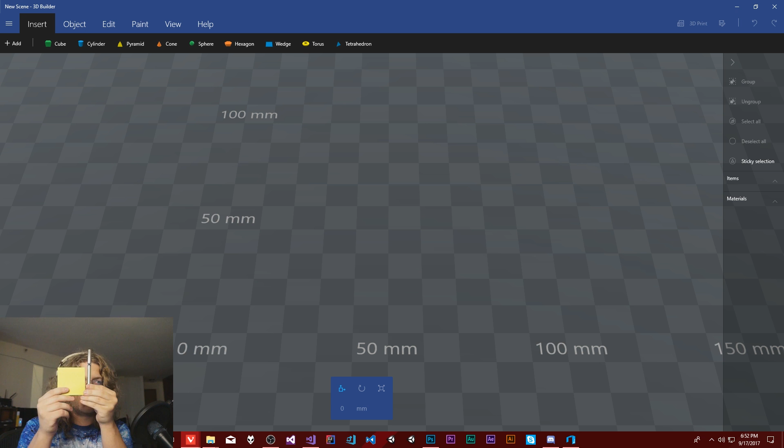Hello Internet! Today we're going to be doing something a little bit different. We're actually going to be working with 3D Builder to build a really quick 3D printing model that I can use to store sticky notes and a pen, and hopefully attach that to the wall so it'll sit like this, and you'll be able to pull this out or pull this out and it will just work. It sounds super simple, but hopefully we can figure out a few additional things about 3D Builder. I've done a video on this before, and hopefully we can dig a little deeper, because we're going to be using strictly 3D Builder to build this entire thing. I'll probably need Cura for 3D printing, but other than that, it should be entirely here.

So the first thing, we need calipers, because we need to measure how thick this pen is. I don't know if you guys can see that, that's going to be hard. Let me actually, hold on, we can do this better.

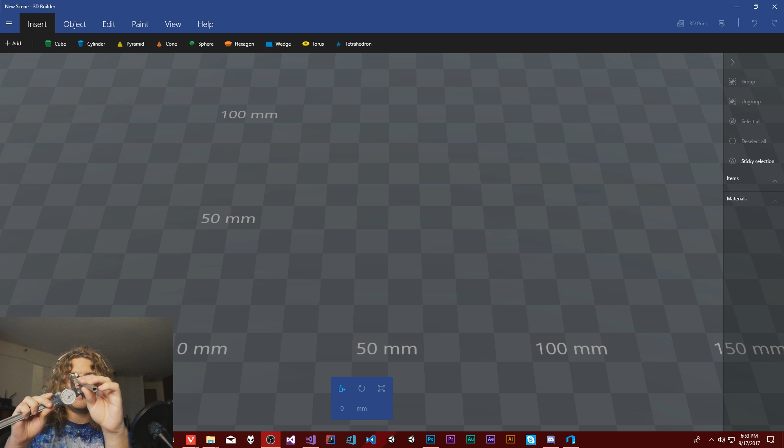Getting back to the calipers, the way these work is they get you fairly precise measurements. I've already measured these, but just so you get the idea, you pinch whatever it is you're measuring in between there, and it will read off along this big line here.

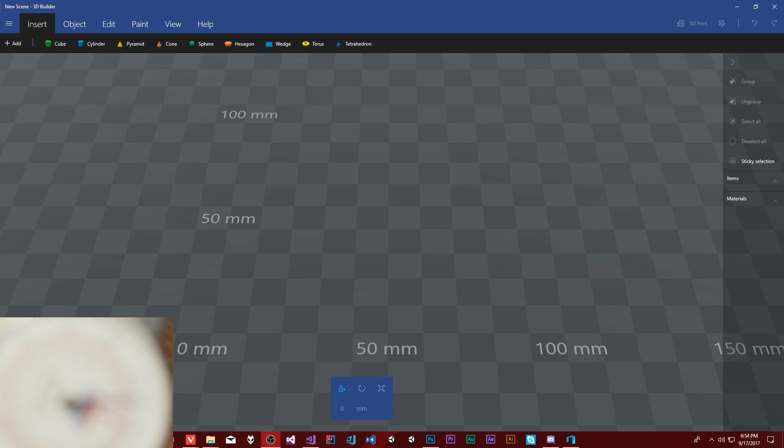There are going to be some measurements. That's going to be totally out of focus because I haven't focused on my camera. Hold on, we're going to get this right. There we go, that ought to work. So if I can, oh, I moved it again. This isn't working very well.

Anyway, doesn't really matter, but all you need to know is this will let you measure the width of something. In this case, this pen is 10, I believe that's centimeters - no, that would be millimeters. 10 millimeters. So the pen is 10 millimeters, which means we need a 10 millimeter wide hole for this to fit into. And these are about the same width.

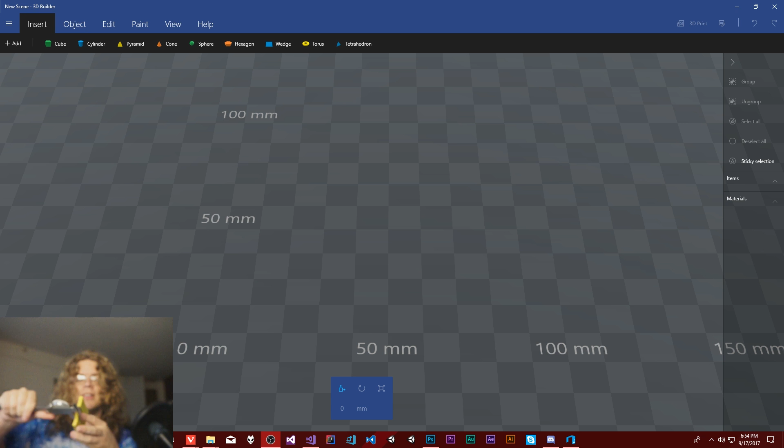They're a little bit thinner, but that's fine, we can use the same measurement and it'll just have a little bit of play. They're actually exactly 3 inches wide, but we're using everything in millimeters, which comes out to about 80. It's actually slightly under 80, but that's plenty for us to use. I don't know why I'm showing that to you, it's not going to be very helpful, but just so you know where all these measurements are coming from, that's how I'm doing it - just measuring them there.

So to fit this, we need something 80 millimeters wide and 10-ish. I'm probably going to round that up to 12, just so the pen doesn't fit tightly. I don't want things tight in there, that just doesn't seem like a good idea.

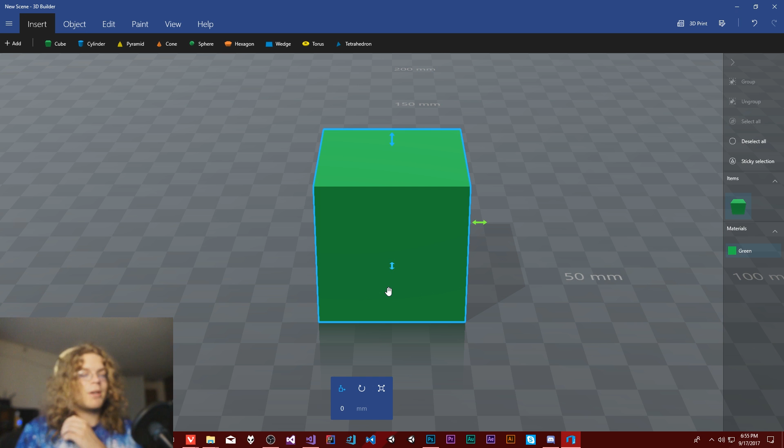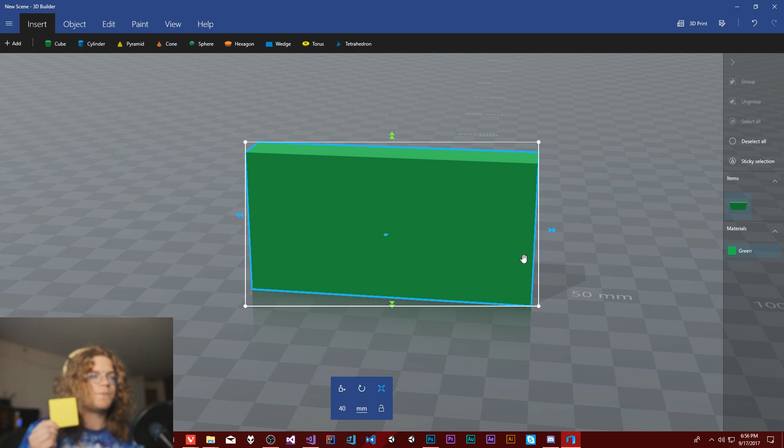So we can get started. What I'm going to do is model two bits. First, we're going to do the inside, which is the parts we're actually cutting out for this. So if I unlock this, we want it 80 millimeters wide and about, let's do 12.5 - that should be plenty. And then height, it's going to be 80 millimeters high, but we don't want it all the way to the top because then we can't pull it out, and that's sort of the key point of holding something there.

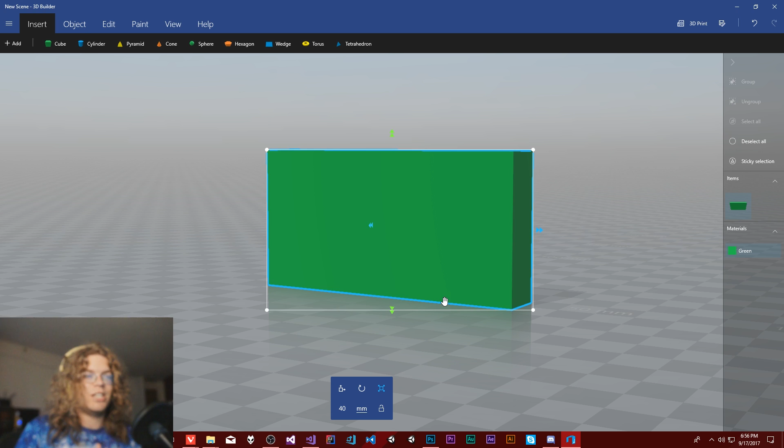So I think we can do - is 60 a good idea? We could actually, let's keep it at 40 millimeters high. We can play with this, it's 3D printing, so we can come back and change all of these later. That's one of the nice things about this - the way we're doing it, hopefully we can come back and pull some of this out and work with it and change how it all works.

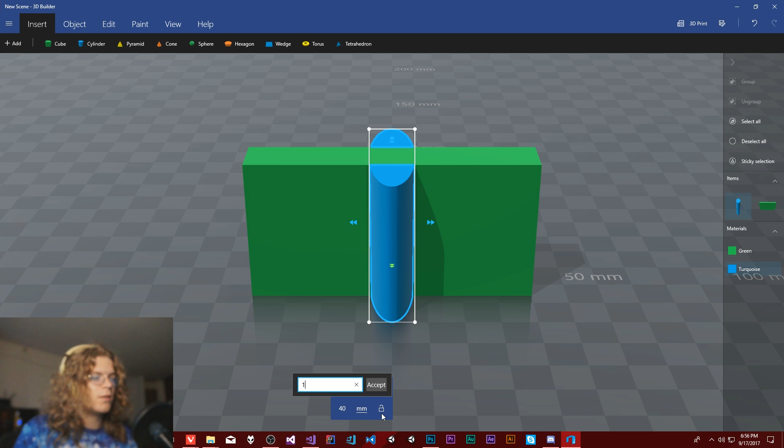But we'll see. Then we need something for the pen. So this is just going to be 12.5 by 12.5, and then we already have 40. And then I just need to offset this so it's not intersecting with that.

So let's see, 51.25 - that'll be 5 millimeters between the two for spacing, but actually, I don't want that. What I'm thinking is about 2 millimeters wide for each of the barriers. So I'm actually going to copy that here and do 48.25, so there's 2 millimeters between the pen and the sticky notes.

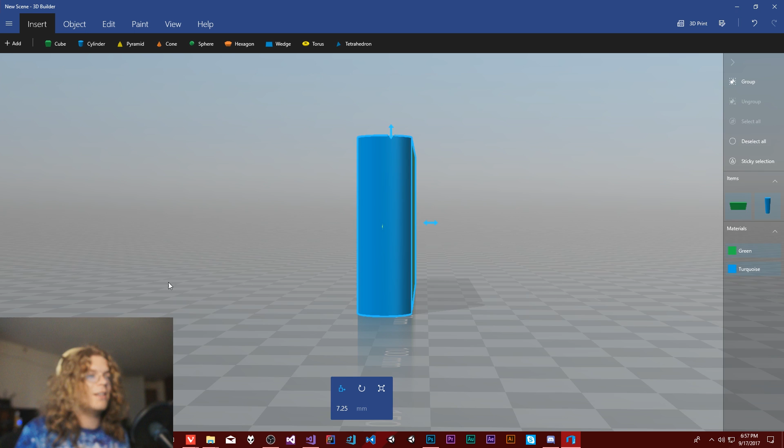And this should pretty much be our first piece. That's really all we need. If we wanted to, we could add additional depth here, so we could have multiple of these sticky notes in one of these, but I'm not really worried about that - I just need one right now. So let's grab, what's the best way to... oops, not that.

Let's join these. So if I merge them, they're now one object. And can I paint these color?

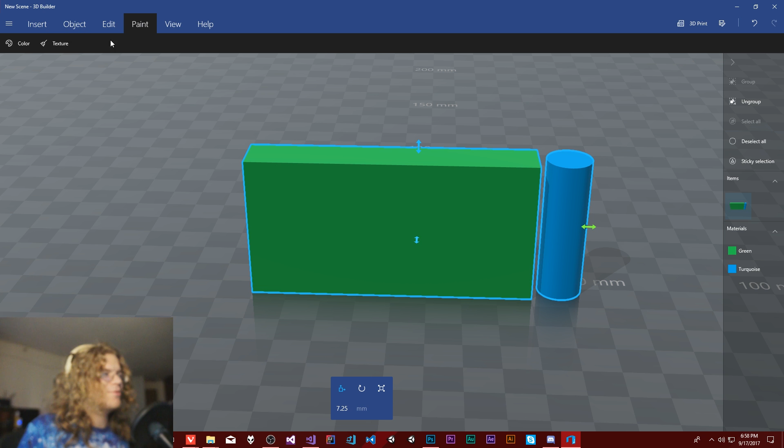That didn't work. Apparently that's not how you paint something. I don't know, kind of would have assumed that would have worked.

Okay, let's ungroup it, and we can select them by material or do whatever. I'm going to try painting it again. Oh, well, that was easy. You have to actually click it. Okay, got it, so that's green. Green is now our...

Okay, what? There we go, you have to be in edit mode to select two things. Got it. Obviously it's kind of showing that I'm still learning these tools, but that's kind of the point here,

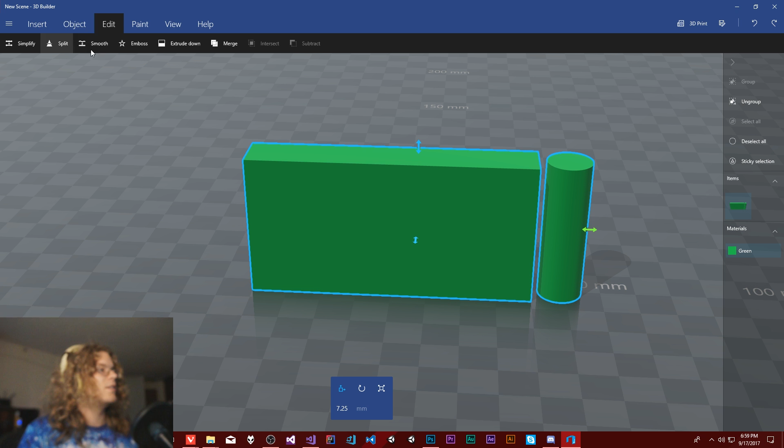is we're all hopefully still learning. So there we go, this is what we want to design around. And so the next thing I'm thinking, we can actually move that back for now. We just need to know how wide it is, or close to how wide it is, and how thick it is. So we had it 12, oops, that's positioning.

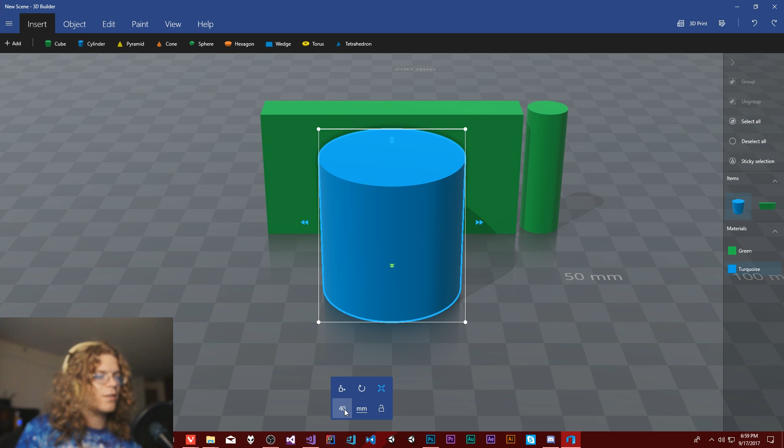We don't want that. I'm going to resize this so this is exactly the same size. And then we need to actually—I'm going off of this, by the way—but anyway, we need to actually increase the size of this by a fixed amount. So in this case, we're going to increase it by 2 millimeters on all sides.

So 4 millimeters, so we can increase that and increase that. And now that's grown. And then the tricky bit is we only want to increase the bottom because this is going to come out—we want a hole in the top. So we don't want to add additional space for that.

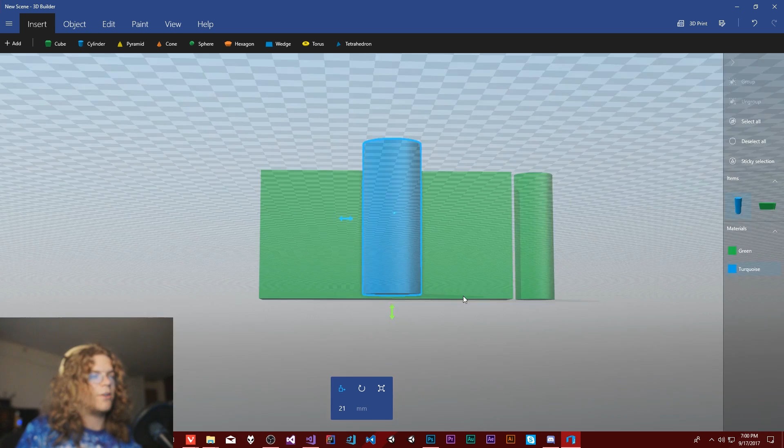So it's actually only 42 millimeters high, which means we can kick that up 1. And there we go. So now it's still sitting on the ground, and you can see it's slightly taller than the back, which is good.

And then we just need to kind of get this in somewhat of alignment. They should be at exactly the same position, because if they're not, this whole thing is not really going to work. 48.25, that seems close—we'll figure out if that's actually right or not in a second.

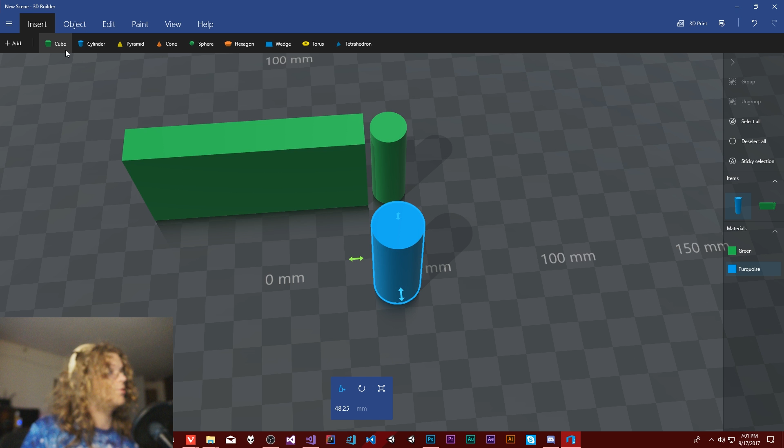But now let's paint this blue, just so the outside is the same color and the inside is the same color, and that way we can kind of visually tell what's going on.

And we need to do the exact same thing here, but we actually need to extend this into the middle of our cylinder. So this is going to be—we said 12.5, so 16.5 again.

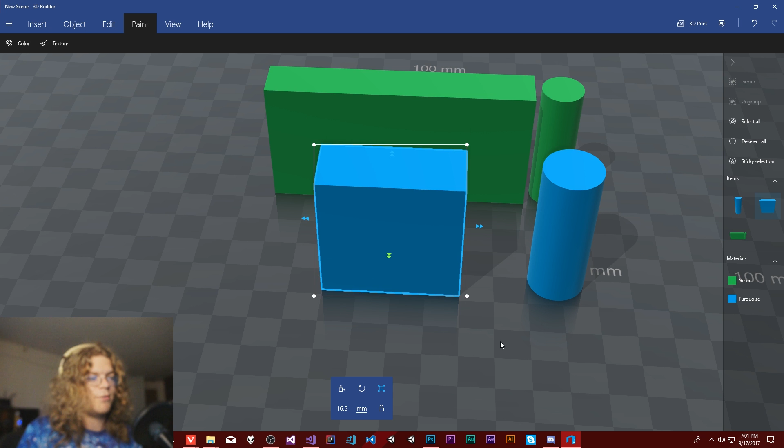And then width is—well, let's do height next because we know that. And then this is going to be 80 plus—does this actually work? Nope, plus 4, plus 2, okay, 82.

So 80 plus 2, we actually need that on both sides, so plus 4. And then that will get us to the edge of this.

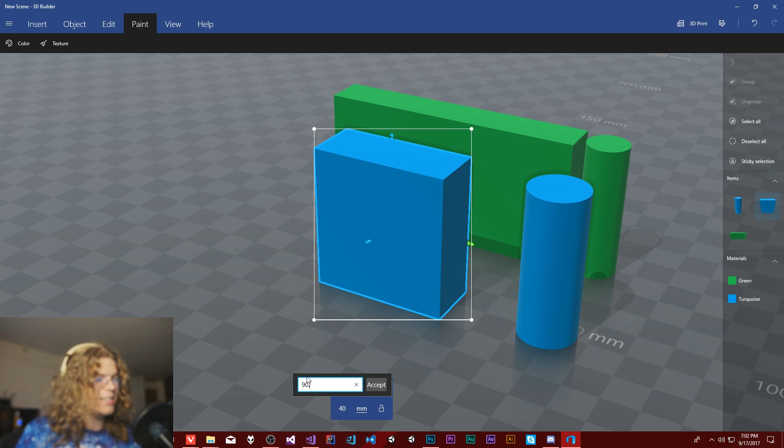And then what we want is to align this like so, so it comes directly into the middle. It just snaps into position. And so this is sort of our attachment.

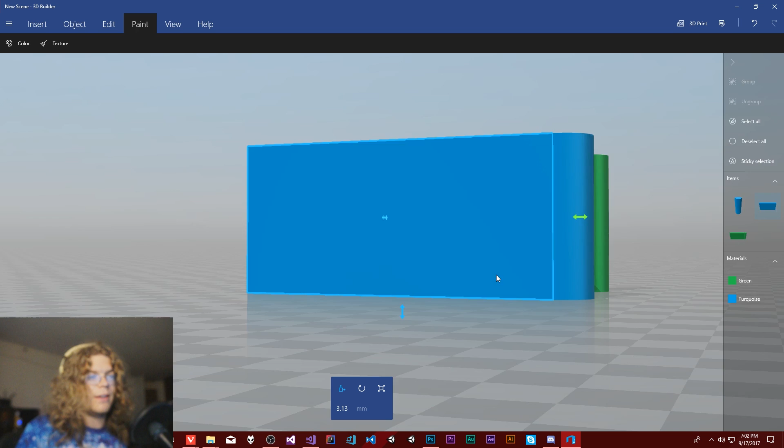What we can do, if we want to make this fancy, is we can either round out the bottom, or I can actually make it so the entire back kind of sits flush, like right here. If I wanted, I could actually tie that in just using another cube.

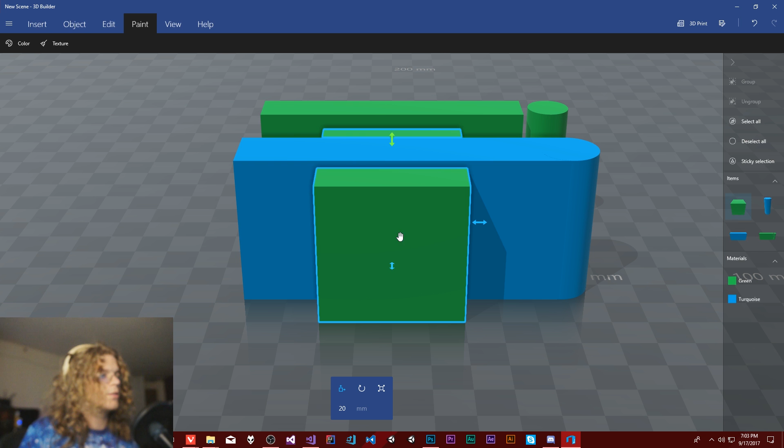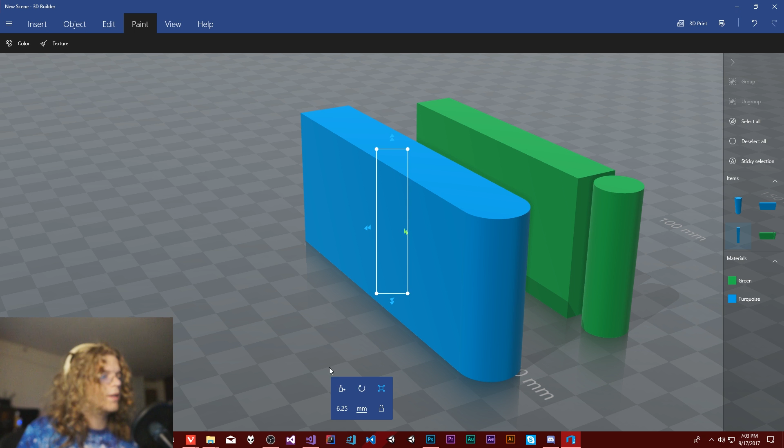So what that would look like is, let's color that. It's going to be 42 high, and then 6.25 by 6.25. And then we'd want to drag it over this way.

Did I not make you tall enough? I don't think I made you tall enough. Yeah, 42, there we go.

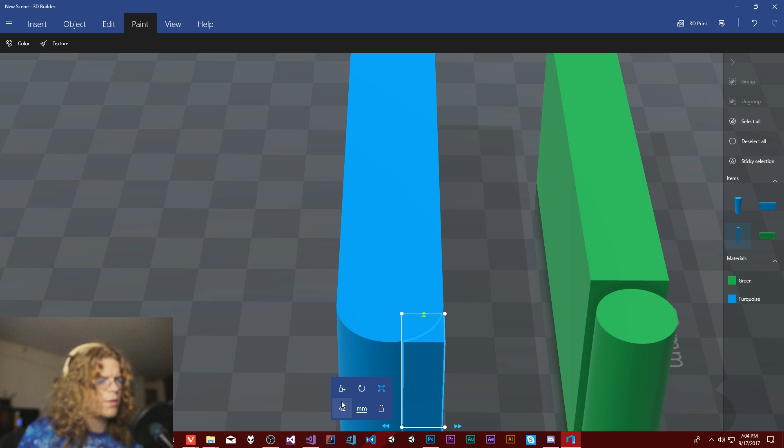And then I can just actually slide this into place, and it should just auto-align for me, like so. And now, if I can deselect it, it should be flush. Looks like we're a little bit off. What could that be?

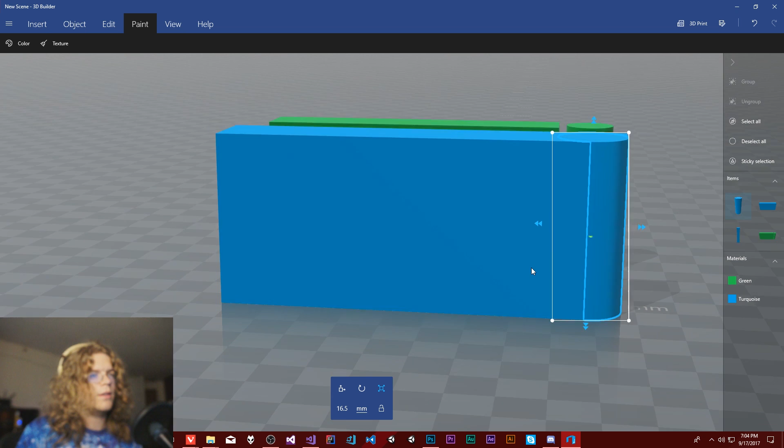Oh, sorry, 16.5 is what we need to divide. So this is going to actually be... that's going to be wrong for the other one too, isn't it? It kind of looks like it might be. Okay, so we have to refine our math a bit. But we can do this one first. 8.25 is what we want for both of these, horizontal and depth.

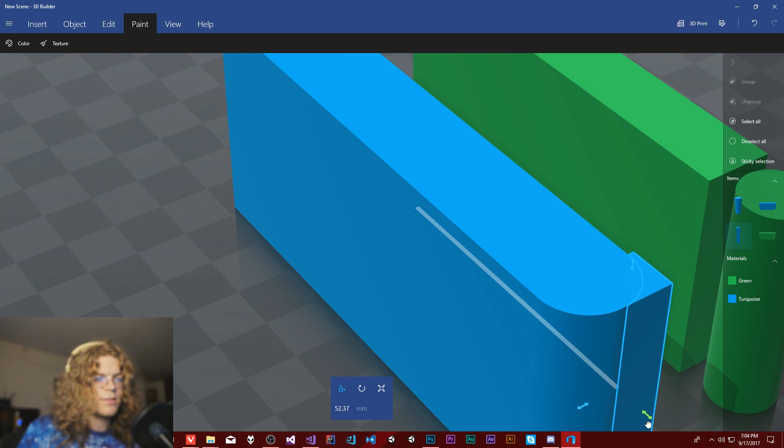And then let's move that into position. So just grab it and it will snap still. So there we go. That is our model, I guess.

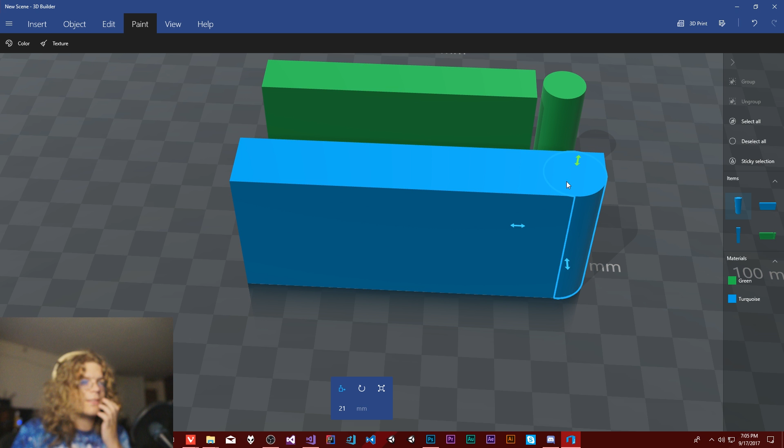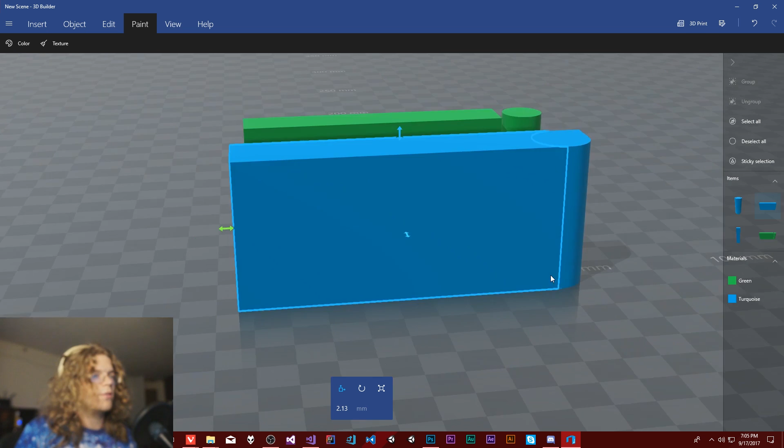Cool. So now we have sort of this round thing that we can use. The only other bit that we want to fix is going to be this, because I did that math wrong. So it's going to be 80 plus 4 plus 8.25, so 92.25. And that's because of the additional depth there, or the additional radius from this. We're measuring this guy and not the other one. So hopefully that gets us closer to where we need to be.

And then I should be able to just group all of those. So now we have this group, which is our exterior. I don't know if you can name that. Doesn't look like it. And then we have our interior bits.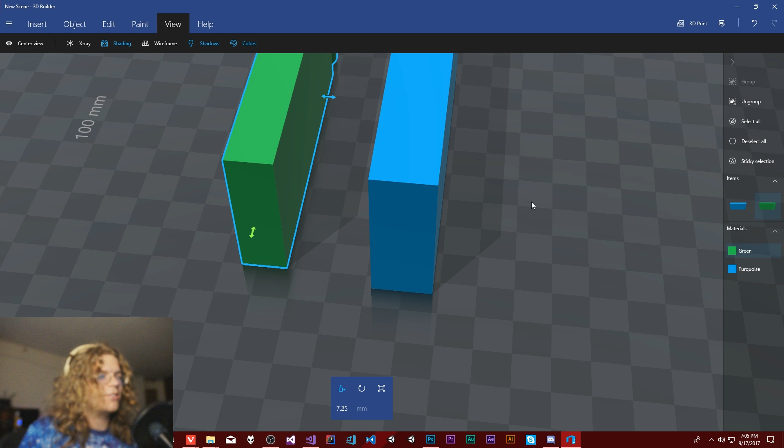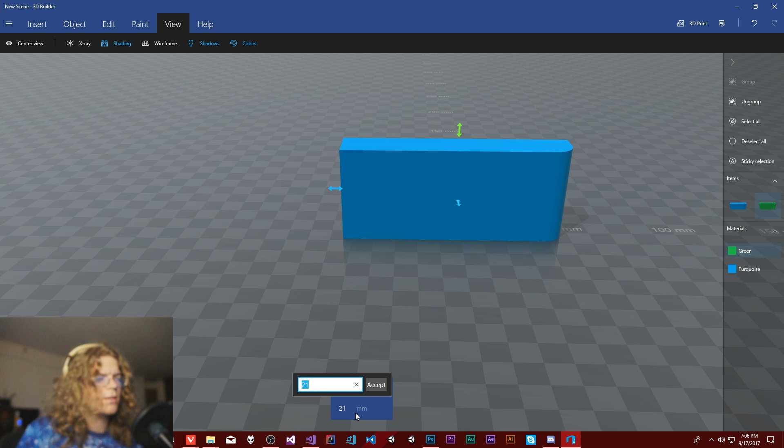So now we need to get the interior into the exterior. Like that. That was easy. And we're going to need to move it up a bit. Let's see, I think we just need to move it up 1, 2. Okay. So there we go. It's now just protruding out the top.

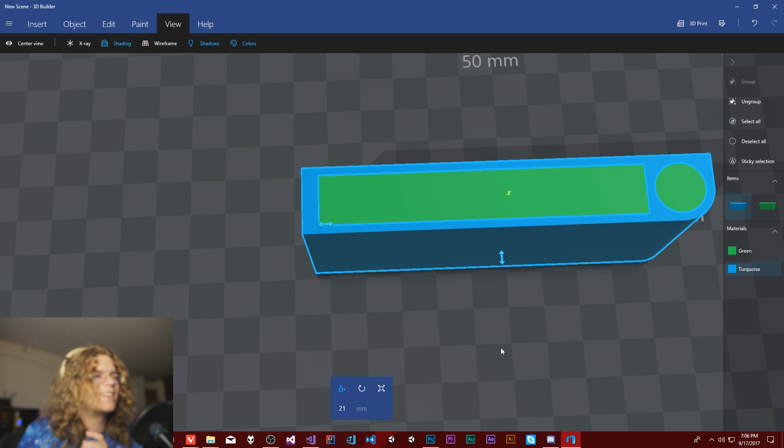Oh, did I not need to increase that? I may not have needed to increase that. Shoot. My math may have been right the first time. So it's too thick over here, at least it doesn't get us a uniform thickness.

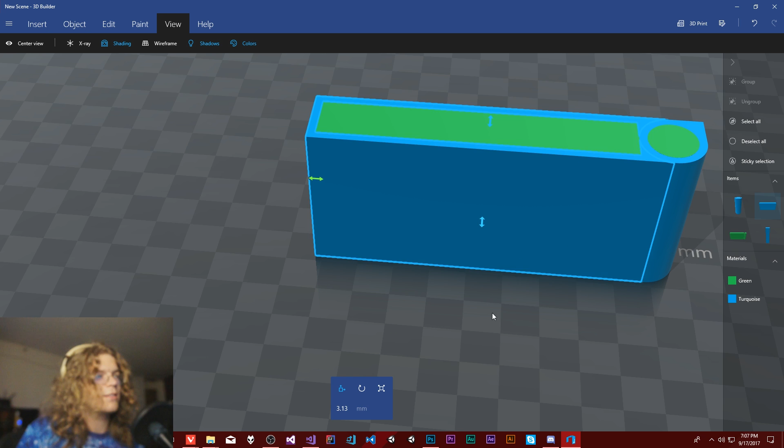So let's select that. Let's ungroup this. Select that and resize this down to 7.25. And then we just need to horizontally slide it until it's in the center and everything kind of lines up again.

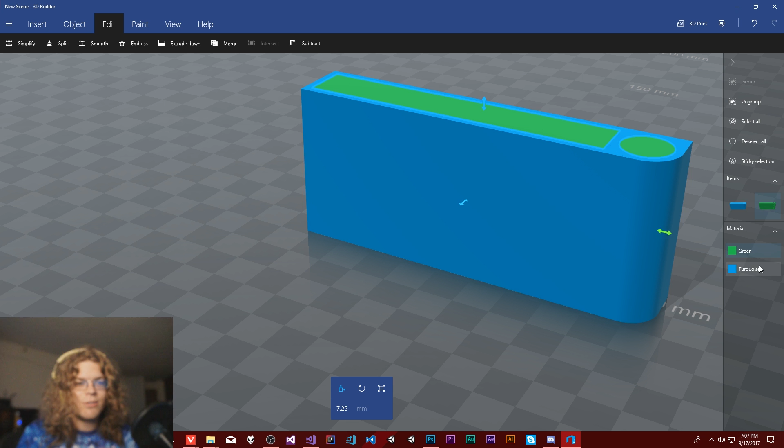So let's select all of our blue, group it. I could actually be selecting it this way, using the materials. Because they all share the same material, you can actually select things by material. So I can select everything that's green or everything that's turquoise, which actually makes things a lot easier. Oops, didn't want to do that.

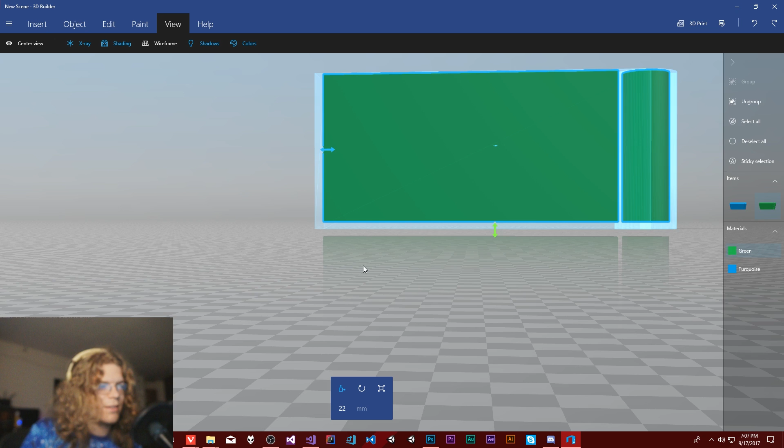And just to make sure everything's looking correct, let's turn on X-ray. And we can actually kind of glance through and see our mesh is actually looking all right. We've got a uniform distance around everything.

So what I'm going to do is save this. Let's just save. This is always slow. I don't know why this is slow, but there's some async operation that gets thrown up that is just super slow.

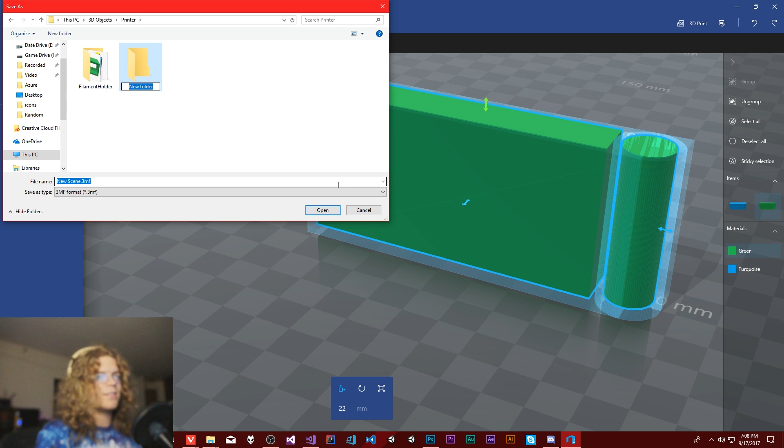So we're going to save this as our sticky note holder, because why not. And we'll save it in two formats. 3MF is what all of these are. I believe that's a CAD format. And STL, which is what we use when we do like Unity exports for printing. That's more of a mesh model.

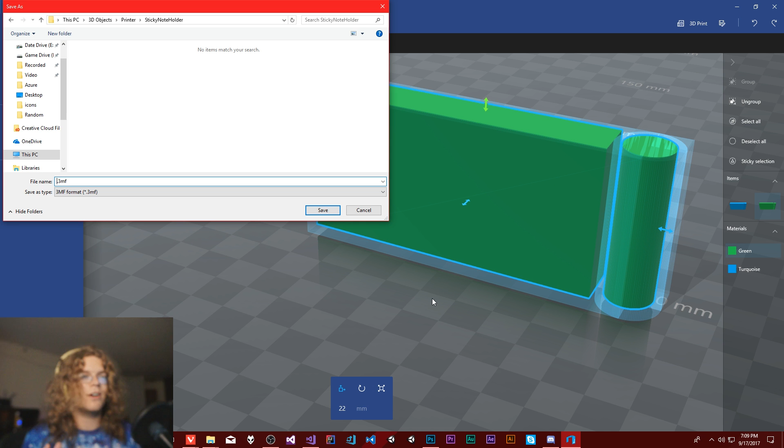And so the difference there is CAD is going to be perfect circles. And so if I actually zoom in on these cylinders, you won't really see the vertices. Well, you will. But if you use a CAD program and you start looking at cylinders or something, they're defined mathematically and not by vertices and things like that. And so because of that, you can actually get far greater detail. You can actually say this thing is a circle, whereas when you do a mesh, you have to kind of say this thing has vertices that kind of resemble a circle or whatever you're trying to make. So that's sort of the difference there.

At least I think I got that right. I'm pretty sure 3MF is designed for those kind of formats. That could just be wrong and it just has extra 3D mesh information, but I'm not entirely sure. Anyway...

Sticky holder, one note. So I can hold one note and one pen. Sure.

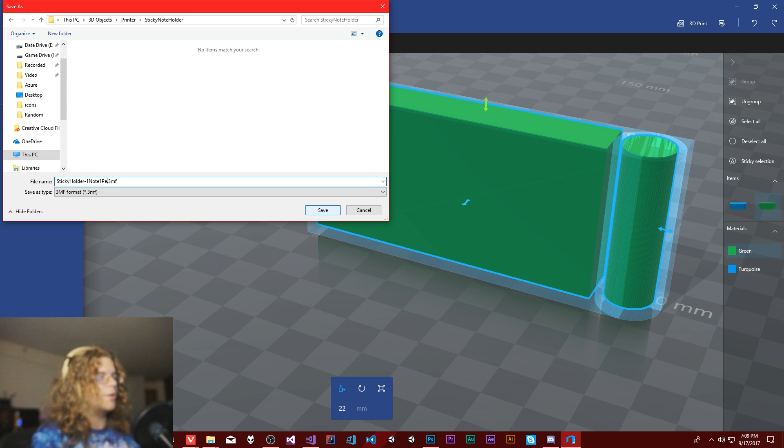Save that. Guess it pulled up too. Yay for async operations with no tests to lock that out so you don't do that multiple times. I bet if you just spam that, you'd get a whole bunch of dialogues.

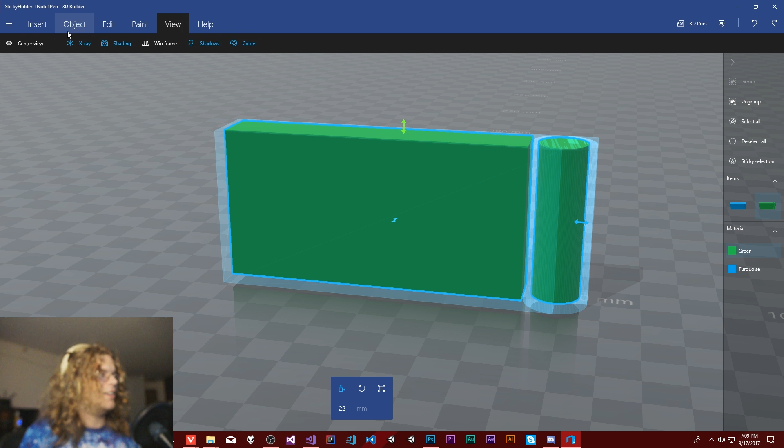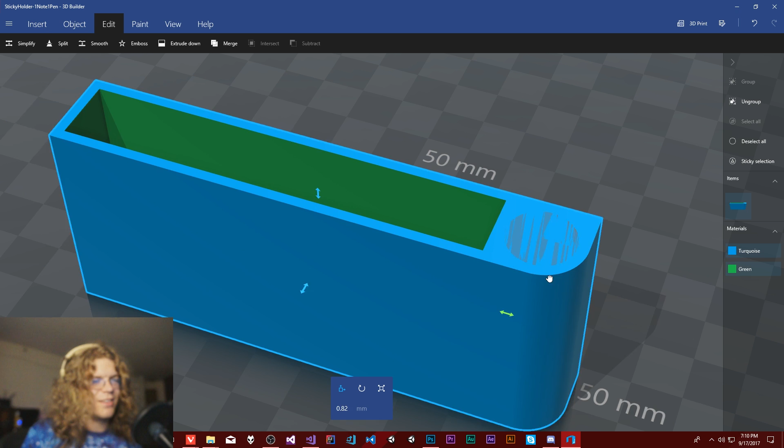Anyway, now that we have that saved, what I'm going to do is subtract it. Oh, that didn't work as well as I had hoped. It sort of works. So you can see we have the cutout for the note, but obviously this other one, that didn't go as well. There's something not quite right there. And now it's one.

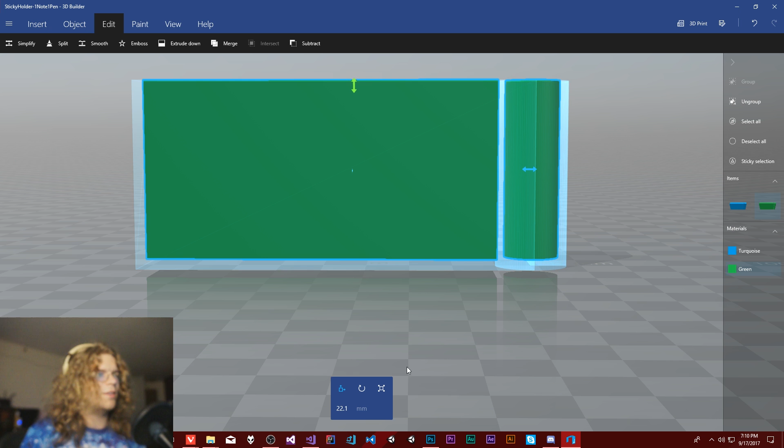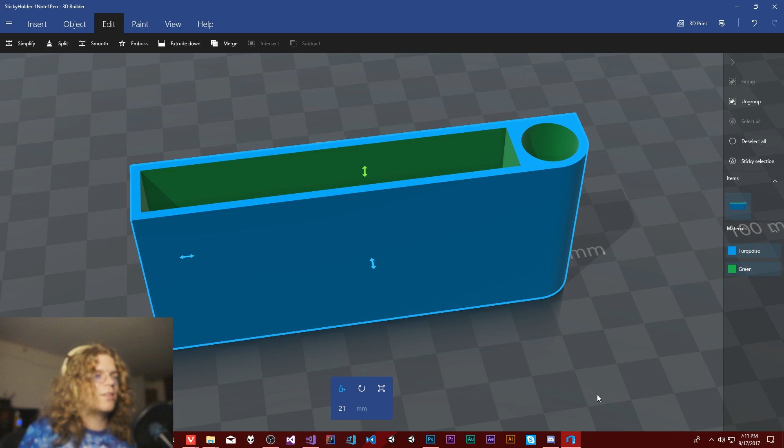All we need is for this to protrude above the surface, since they were completely flush with one another it may have just not been able to determine that. Now that I've put it just barely above, we do lose slightly on the height, which we could fix if we wanted to, but I don't think a tenth of a millimeter is really that big of a concern. It's not perfect, but that's fine.

This looks like something we can actually use. So the pen would go in here, and you'd have your sticky note in the other one, and theoretically we could add extensions and it could just keep going.

So I think that's that, there's not much else to it. I am going to save this as an STL format, like so.

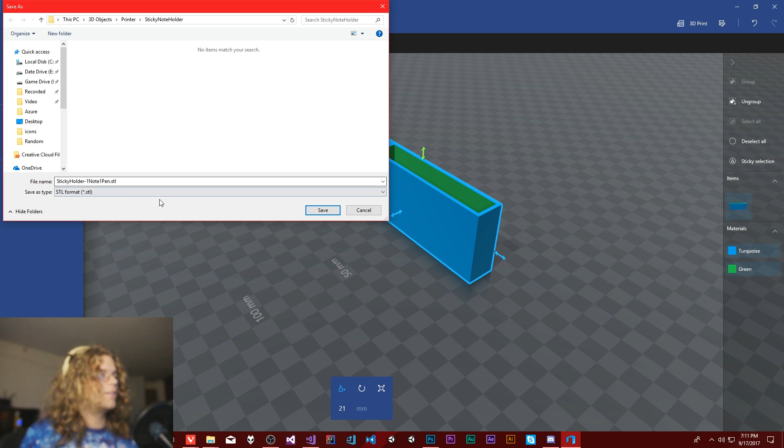Some stuff is going to get lost because this is not the 3MF format, which is what 3D Builder prefers. The next thing is I'm going to load this into Cura, which is a program that can tell you how your print is going to work and how it's all going to get configured.

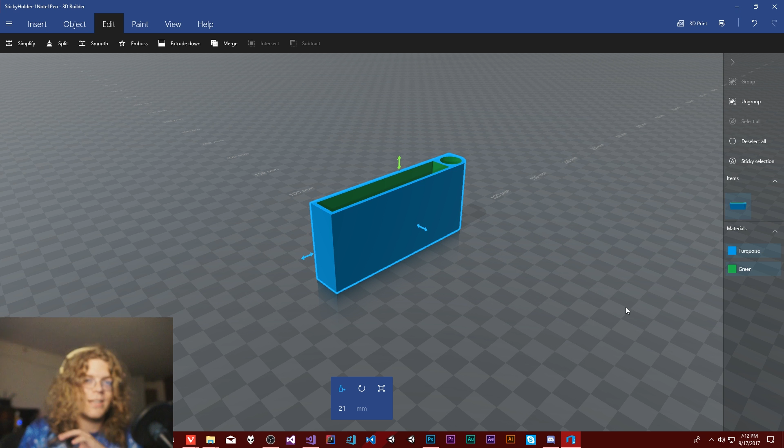So I will be right back and we will have that open, and I can walk you through configuring this to actually print. Then we can print it and I will show you the final result. Hopefully. So let's do that.

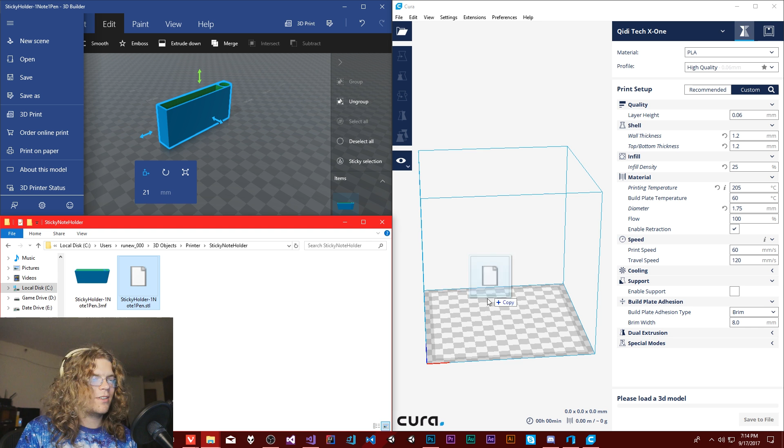All right, so I fixed the focus on my camera because I didn't change that back, apparently. So what we need to do is pull this guy, our STL file, over into Cura, and you'll see it load, and then it does this slicing thing.

The way a 3D printer works is it prints plastic in a little stream, kind of like you're icing a cake, where it does a stream back and forth over and over again. We can actually see that if I turn on these layers.

That doesn't appear to be working. Nope. Okay, that worked well. What? How?

I haven't actually tried to use this recently, so I don't really know what I'm doing. But...

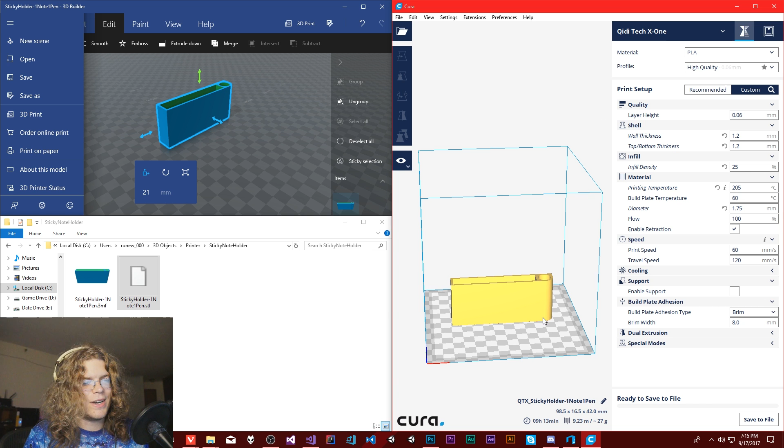So there is a way... I guess I'll just leave it there. There is a way to actually show how these are going to be printed, because they're not just printed—it's not just 'oh, I want to make this,' it doesn't really work like that. It'll go around the outside, and you can see all of these settings over here.

So we have, for example, a setting for wall thickness. The way models work is there is a wall, which is the exterior wall of the mesh, and then there is also an inside, an infill.

We're not really going to see that here, but with more complex models, like if you're printing a cube, you'll have a solid wall, and the inside is actually not solid—it's filled with a percentage of material that acts as a support structure, so it can still bear weight and hold up like the roof of your cube. But you don't need to fill the inside of it because you're not going to see it, unless you need it for structural reasons—it's not really needed at all.

So that lets you configure that. There's a layer height, so you can tweak that if you want more precision, more layers, which will let you do more stuff—you can set that down. All of this is kind of stuff that you have to tweak.

There's temperature for the plastic you're using. I typically print with PLA, which is sugar-based, I think—sugar or corn, one of the two, maybe both. I'm not entirely sure, but it is an organic plastic, which means it biodegrades, so you don't really have to worry as much about it, and it doesn't smell, which in an apartment is nice.

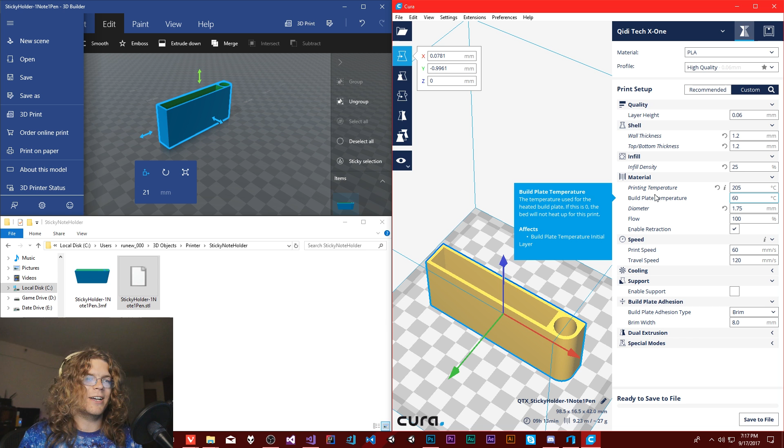But point being, this is sort of what we're going to print. So we took it from up here on the top left, exported it to this STL file, and then imported it into Cura. Actually, if I click this 'save to file,' it will generate a G-code file, this guy, which printers then consume.

This G-code file tells the printer—it actually controls the movement of the print head and tells it all the configurations it needs, which I think we can actually view what that generates somehow. Well, actually there's an easy way to do that. Do that, save it, open that folder...

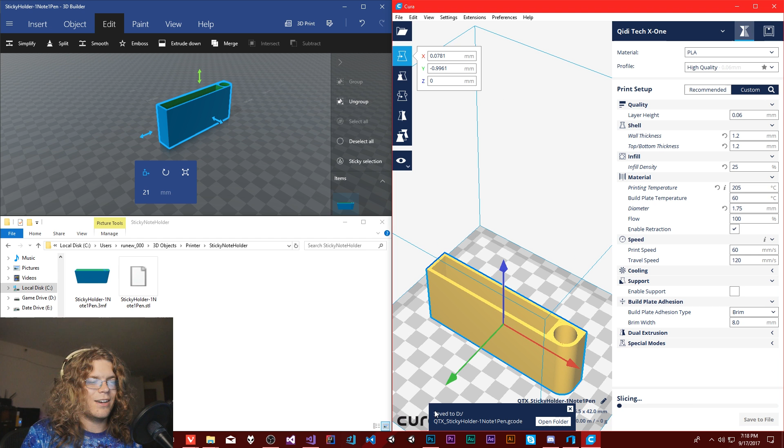And then open this with something like Visual Studio Code. Ta-da! And this should look a lot like assembly, I'm hoping. Yeah, so you get these commands that tell it to do something, and the more complicated your model, the more complicated this gets.

But I don't have any idea what any of this means—literally zero idea. That's not really the point. It just kind of gives you an idea of what everything is doing.

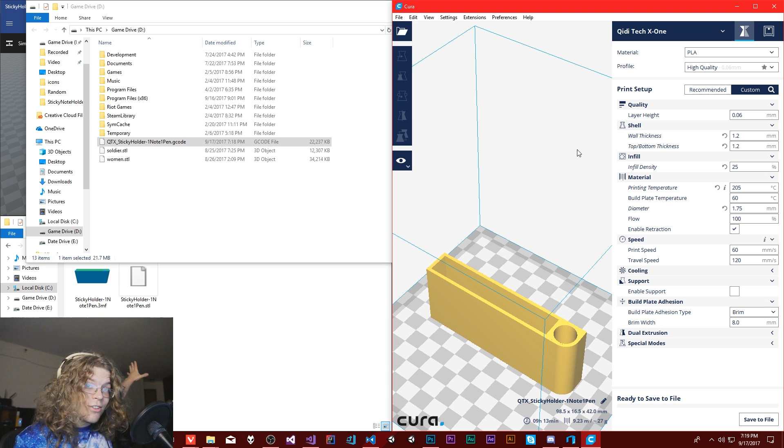And so it pretty much is just commands that go straight to your printer, and that's how that works. So I'm going to send this over to my printer, see how that works, and get the result out. I'll be back in a bit.